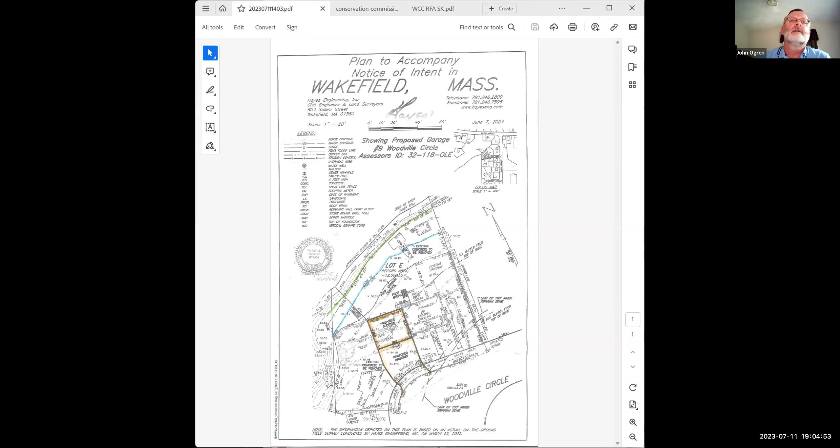This property actually backs up to the Mill River. In terms of what's existing on the lot, there's an existing driveway to the right of the house, there's an existing house, and pretty much the remainder of the lot is lawn area. This is the driveway, existing dwelling. There's some concrete pad areas, there's a shed out back. The Mill River is basically the center line and the property line for this property, and essentially the remainder of this property is basically lawn.

In terms of resources, there's what we've identified as a top of bank, which is the top of bank for the Mill River. We're using that essentially as the start of the riverfront area. If you go 100 feet from that top of bank, that's essentially this darker line here. As you can see, pretty much the entire lot is located within that first 100-foot riparian zone. As far as other resource areas, there is FEMA AE zone, 100-year flood, identified as elevation 56, and that's that blue line here.

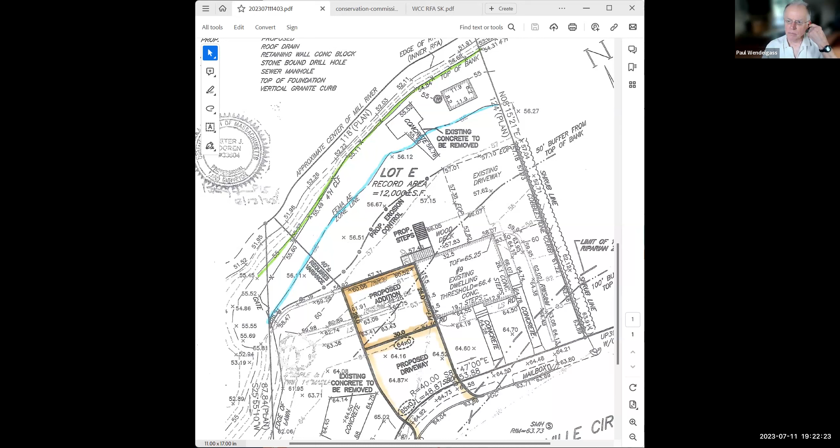Can you see it? I think John has to stop sharing. Stop, I'm sorry. Yep. I am stopping. Yeah, it's on page 4 of the narrative. Sorry about the scrolling.

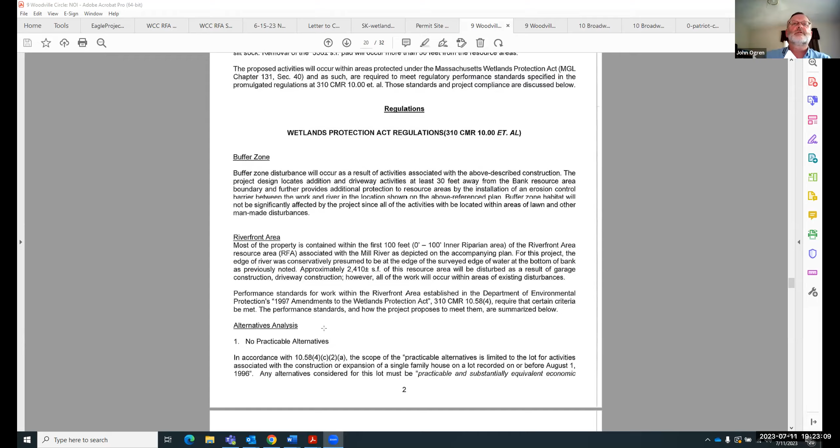Keep going a little further. So here's the alternatives analysis. Keep going, it's on page 4. It's the last one. This is the no significant adverse impact section.

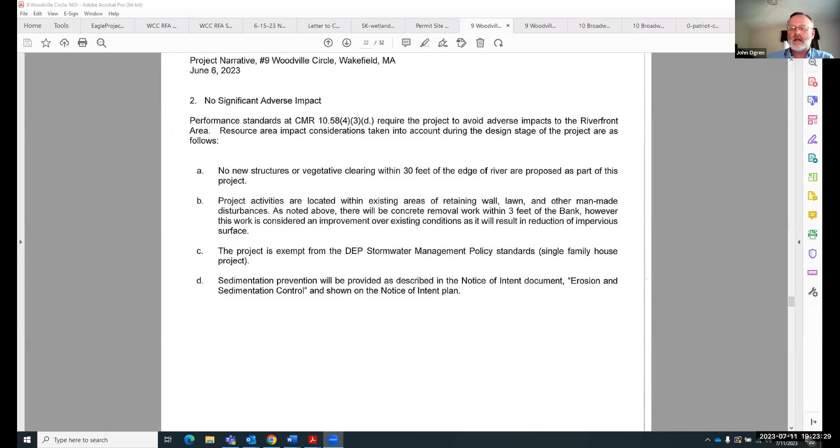As part of part A, it states that the requirement of A may be allowed only if the applicant demonstrates, by a preponderance of evidence from a competent source, that the area of undisturbed vegetation within the overall average width of 50 feet will provide equivalent protection of the riverfront area, but that the partial rebuttal of the presumption of significance is sufficient to justify the lesser area of undisturbed vegetation. But again, this is an area that's already been disturbed, and that's why this does apply, and this is the section it would be under, but it really doesn't address a situation like this.

John, is the grass right up to the edge of the river, or top of bank? It's right up to the bank, yes, right up to that fence, which is right at the top of bank.

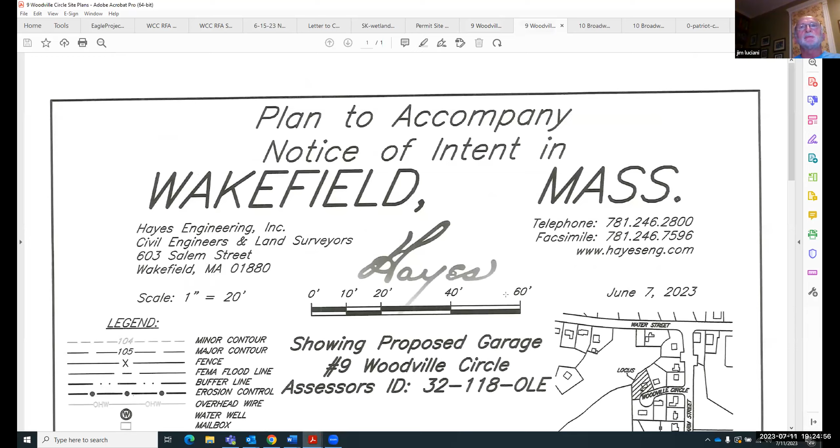So basically we're replacing a lawn with a building - with a garage or addition, correct, and a driveway, the proposed driveway, right? Yeah, we're gonna want to do a site walk, but I think you'd want to look at recharging, if you've got the proper depth of soil before groundwater.

Yeah, we can look to add some infiltration for the roof runoff.

Rebecca, do you have anything you'd like to add? Yeah, I have actually a bunch of questions.

One of them was, John, you were talking about that fence along the top of bank. I think that was probably put up when, behind the house, there used to be a pool. My assumption is when they put in the pool, they put up the fence. I don't have any previous filings for this lot, so they didn't - when they put in the pool, and then I think they subsequently filled in the pool, and I didn't have any information on it. No one ever filed anything. So I'm wondering, that fence that's there, it wouldn't have met the requirements of a minor project because it's not 50 feet away. And it most likely - did you say it was chain link to the ground?

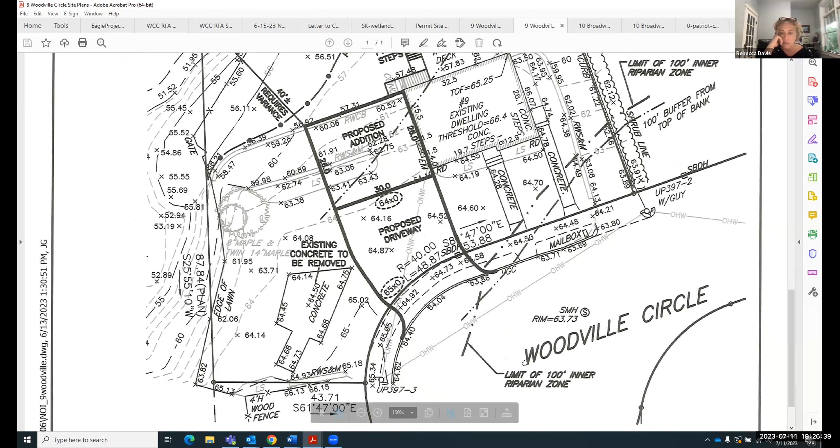Yes. Okay, so it would have probably prevented wildlife passage. I'm wondering, is the homeowner still interested in keeping that fence there if there's no longer a pool? I'm indifferent towards it, it can go, it can stay.

Okay, that was one question. I had a couple. And then there's a shed back there with a well - is that a well? If you could scroll up a little bit. And if it is a well, there is, is that just for irrigation or what's that for? Yes ma'am, irrigation. Okay, I don't have any information on the shed or the well either.

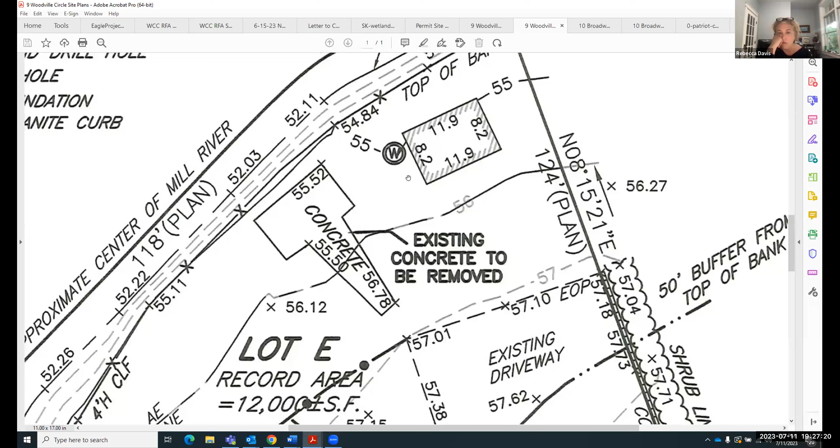I don't know when that shed was put up there, I'm guessing between like 95 and 2000, I think. So I just wasn't sure about what was going on over there with that well and the shed.

And then I had another question. All right, that would have been for Libby a little bit more, but yeah, thank you.

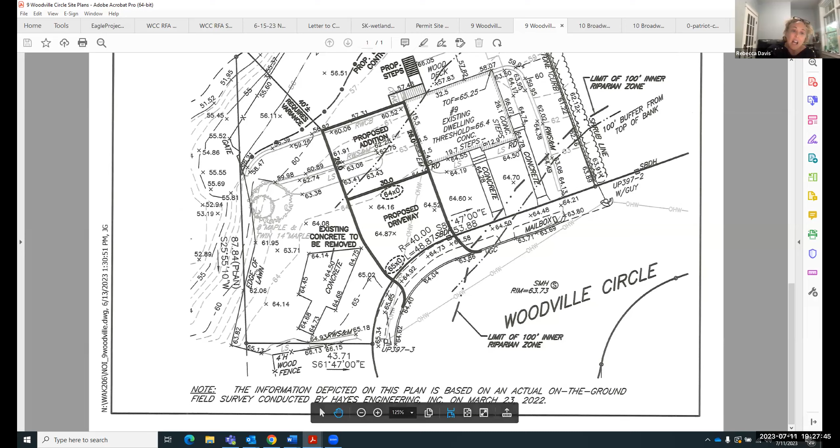Zooming out - can you see, go to the lot line that's mostly to the west, down by the road, go down a little bit. All right, so to the left where it says edge of lawn, and then on the next lot over it slopes downward. Do you know, Libby, I know that's not the property there, but do you know if she looked to see if there was wetland over there? Because on one of the aerials I have, it looks like it wraps around, and I'm just wondering if she noted how close it would have been to something there.

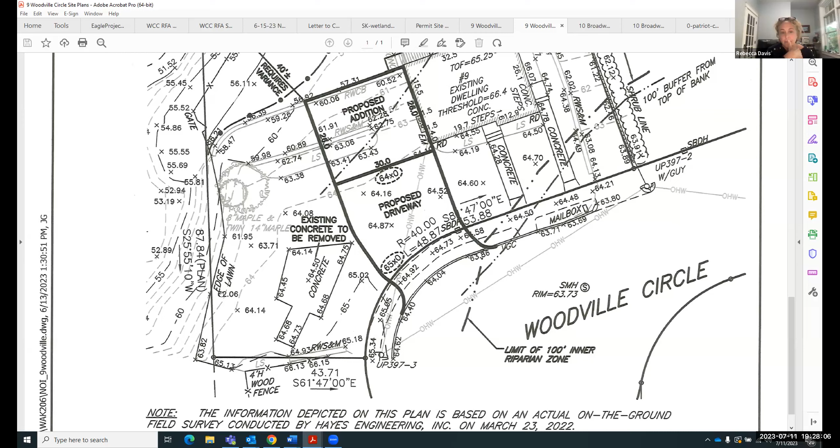Not expecting her to go on anyone else's property, just wondering if she noticed it when she was over there. Yeah, I don't believe Libby went over there and looked in terms of the wetlands, no. Yeah, that's the spot. All right, well, we can take a peek at that on a site visit anyway.

I was just curious. And then I was going to offer Teresa to go through the riverfront with you - if you want, I can try to pick out the topics, 1, 2, 3, 4, and we can go through some of it pretty quick. That'd be great, Rebecca. I think that would be helpful. That would be extremely helpful. I feel like we're starting for chapter 3 of a story - I'm sorry, I want to go back to chapter 1 and say, what are the regulations pertinent to building in a riverfront? Thank you.

What John was saying was that when you have a project within the riverfront that's not degraded with impervious surfaces, even though it's developed, it still falls under that initial category, similar to a new development. So they have you go through all the requirements. Starting with number 1, it just says the protection of other resources. Well, they don't seem to be doing any work in any other resources, so I think you've already satisfied number 1.

Number 2 is regulation? Yeah, sorry, finally. I'll tell you where it is. Do you have your regs in front of you? Yeah, it's 10.5834. Okay, thank you.

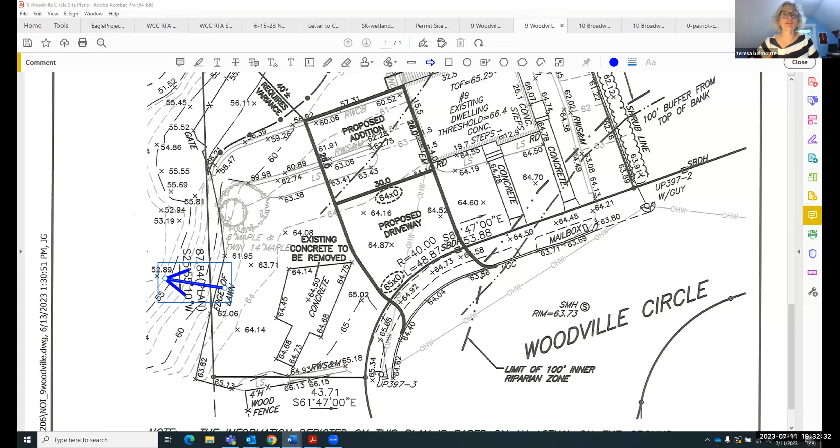Rebecca, this has to do with whether or not alternatives are practicable. Alternatives to what? The alternative is not to build something. Yes, because wherever you build it's within 100 feet. It's not an issue of, gee, can we build a house anywhere else, there is a house. And the issue is whether or not you should be able to build an addition and a new driveway in an area that's riverfront that the regulations govern. I don't know how you could ever have a practical alternative when you're doing it within the 100 feet.

For that matter, that's kind of what I'm getting at, is it's sort of, if you start with the assumption that nothing is allowed, versus if you start with the assumption that the addition is allowed, then there's a question of what is the most practicable way of making the addition, that begs the question completely. All I want to do is understand this. I just want to go through the language, because I'm missing something here. Something doesn't seem right to me, and I feel it's my fault for not understanding this better.

Rebecca, what would you say, how could there be a practical alternative, because again, there's no alternative, because no matter what you do, it's going to be within 100 feet. So, no alternative.

I know what you're saying. I don't disagree. I think when you run through these things, it's...

If this lot were a wooded lot, and I think this is what John was alluding to, you could require them to maintain that 100-foot zone, or set it back as far as possible. But setting it further back, you're still within the 100-foot, so there's no difference, right? What John was saying is if there were natural vegetation there, you would maintain it. But there isn't, so that's the thing.

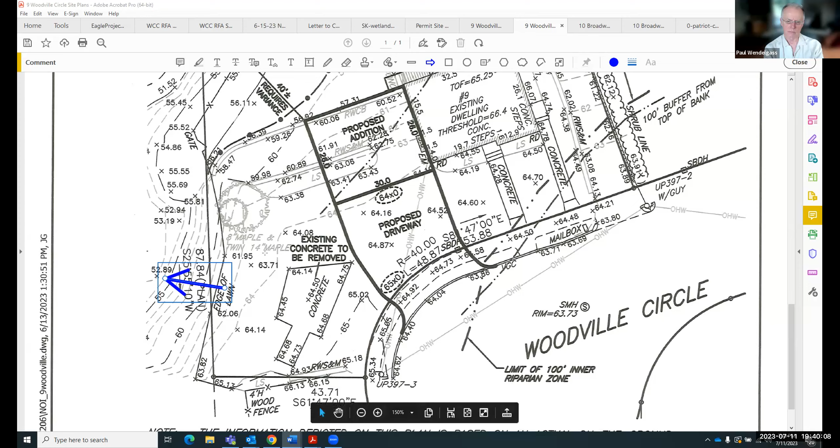How much of the lot is what, Rebecca? Developed. Because it is all on the riverfront, not developed - vegetated. Yeah, you could say that, that's a better way of saying it.

Can you guys see this, I just shared my screen. I don't know if you can see that. No, we're still seeing the drawing. John, wanna stop yours? Okay, here we go. Go ahead, I stopped it. Yep, I see it.

If you look at this, Paul, thank you, it's page 233 for anyone looking at the 246 pages of regulations. If you do it on the internet you get page numbers, it's a godsend. It says this D is the work, including proposed mitigation measures, must have no significant adverse impact.

Then it says within the 200-foot riverfront areas, which we are in, we may allow alteration of up to 5,000 square feet provided that at a minimum a 100-foot wide area of undisturbed vegetation is provided. Well, that ain't happening here, so it doesn't meet that.

At a minimum, if there's not 100 feet of undisturbed vegetation within the riverfront area, existing vegetative cover shall be preserved or extended to the maximum extent feasible to approximate a 100-foot wide corridor. Replication and compensatory storage required to meet the resource area performance standards are allowed within this area.

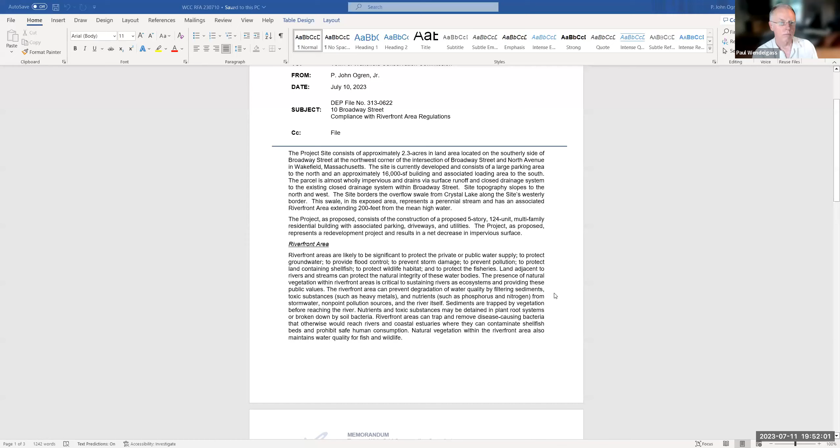All right, so there's a lot more background information, but to get back to the performance standards for riverfront area, there are sections A through G, and I can go through each one individually, and if the commission has any questions, we can certainly answer them.

A: at a minimum, the proposed work shall result in an improvement over existing conditions of the capacity of the riverfront area to protect the interests identified in Mass General Law 131 Section 40. When a lot is previously developed but no portion of the riverfront area is degraded, the requirements of 310 CMR 10.58-4 shall be met. I think there's no question that on this site, any of the areas in the riverfront area were degraded. In the existing condition, it's either crushed stone, pavement, or building.

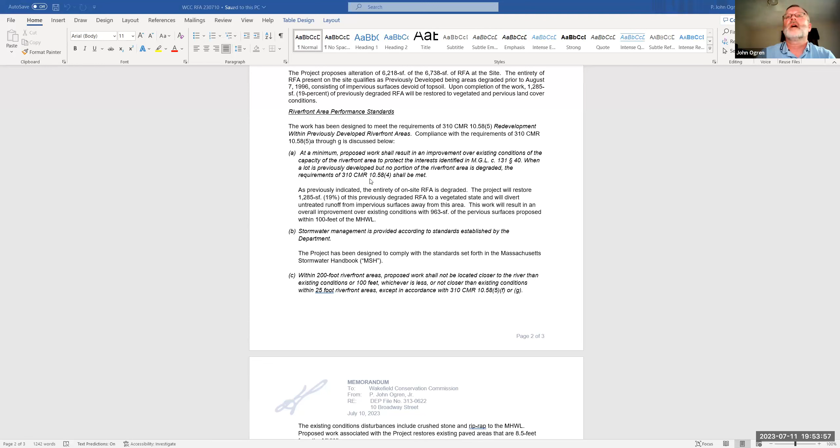So the entirety of the on-site riverfront area is degraded. The project will restore about 1,285 square feet, about 19% of the riverfront area of this previously degraded riverfront area to a vegetated state. This will also divert untreated runoff from impervious areas away from the riverfront area. This work will result in an overall improvement over existing conditions, with 963 square feet of pervious area proposed within the 100-foot riverfront riparian zone.

Stormwater management is provided according to standards established by the department. This project has been designed to comply with the standards set forth in the Massachusetts stormwater handbook.

On that note, this project has gone through some evolution in terms of number of units, the building, and parking. We're working on detail and the final design in terms of layout of the parking and building, which has been presented to the commission. We're working on detailed engineering plans and responses to comments received from the engineering department. Those will all be included along with an updated stormwater management report and the response to engineering, which should be forthcoming in the next week, so the commission will have that to review.

Within the 200-foot riverfront area, the proposed work shall not be closer to the river than the existing condition, or 100 feet, whichever is less, or not closer than existing conditions within the 25-foot riverfront area, except in accordance with F and G.

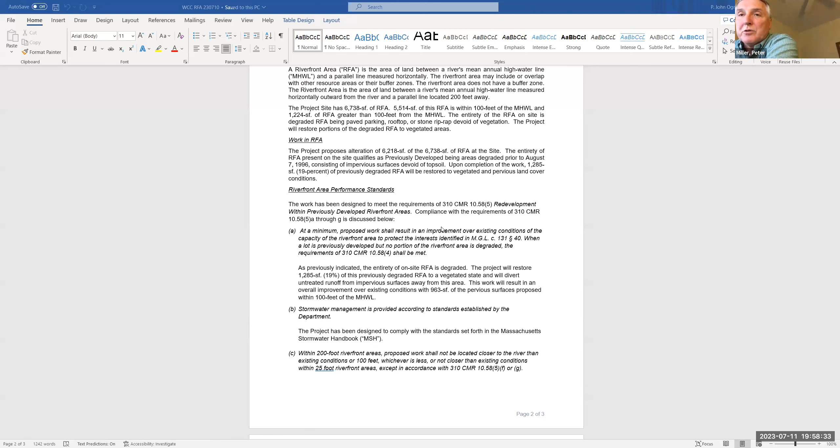Anybody have any questions or comments regarding that? John, could you put up that first picture you showed of the latest? Just want to see it.

So essentially what we're saying is, within this riverfront area, there are areas that we pulled back — the pavement is essentially right up to this crushed stone right here. We're pulling that pavement back in that area and vegetating it. We have a landscaping plan, and I'll also be submitting an updated version of it, adding bushes and trees in this area. Essentially we're converting this area from degraded to vegetated, and then beyond the 100-foot riverfront area, this area here as well.

John, where do you stand with the ZBA, or did you not get there yet? That's a good question. I believe we're at a point where — and that's why I finally decided to go forward with the more detailed engineering — we've pretty much locked in the footprint of the building and the parking layout. They're now talking more about the architectural features or the design of the look of the building itself.

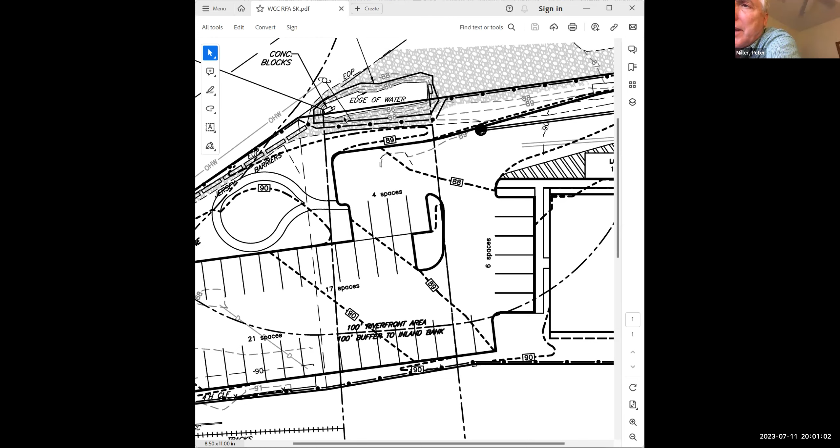Okay, got it. Where's the other property? There was another property owner that had property between the parking lot and another parcel. There's a fairly wide crushed stone area in between the two properties, and then there's parking over here on this adjacent lot. Looking out towards the lake, there was a building right along the property line, and trucks or machines were parked along this area.

This seems like a very unusual, isolated piece of water, and it's a river. From a river and wildlife habitat and corridor standpoint, it seems pretty limited, but there's no criteria as far as value, and under the definition with the updated USGS, this would qualify as a river.

Okay, any other questions? I have a thought, John. I assume that when you go before the ZBA, they're going to want to approve the landscaping plan, right? We've been requiring applicants with files with us to plant native species within the 100-foot buffer zone, so I don't know specifically, but I know you have the landscaping plan. I do have a copy of it. I don't know if you're going to be updating it.

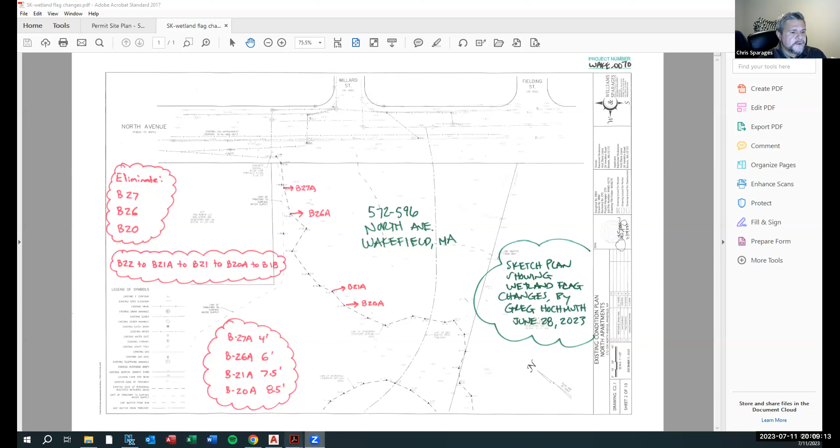And then what we did was we updated the site plan. Sometimes I don't know if it switches over to the other plan. Do you see a blank screen now? Okay, thank you. Let me just zoom in.

I'll start up here near North Ave, and you can see the old flags versus the new flags. So B26 was back here, and we moved it up slope a little bit. Coming down here, B21 was back here, we added a new flag, B21A, a little bit further up the slope. And you can see here this was the move between where B20 was and B20A, the new flag. I think that was the last one.

So if we were to show you the revised topographic plan, we do have a couple of changes to the wetland line and the distance between the wetland line and our proposed limit of work on this plan, B20A, 21A, and up here, B27 and B26.

In addition to the wetland line review, just to close the loop on the landscaping plan - when we presented it at the last meeting on the 20th, that plan didn't have a stamp and signature. It was sort of a formality, but I followed up with our landscape architect, Elliot Brundage, and got him to stamp and sign his plan. We submitted a stamped and signed version showing that the plantings within the buffer zone were to be changed to make sure they were all native species. That was also submitted for the record.

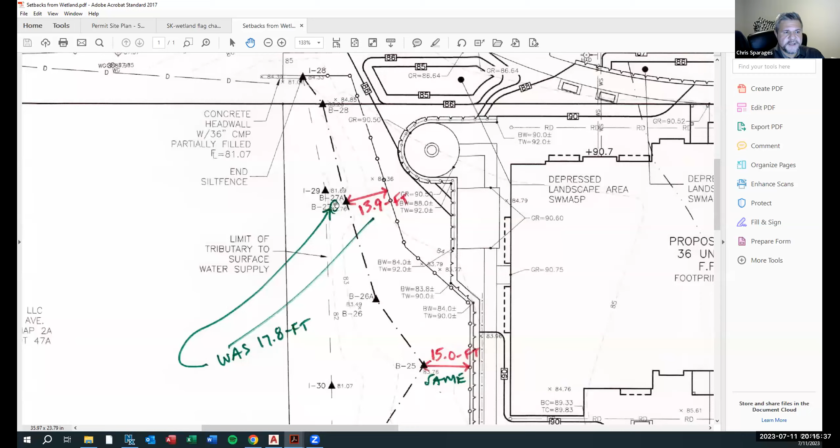This was our one previous pinch point that stayed the same, and here are the ones that got a little bit closer. When this flag was added, it caused a little bit of a weird shape here, and if you measure the closest distance from our erosion control line to the wetland flag, it's 7.7 feet now, where it was 15.1 feet. And similarly, where B20 was moved, it was 21.1 feet and now it's 12.7.

Chris, that's a wall in that corner, right? That's 7'7" and 12'7". That's right.

Because of the lay of the land, and that we have to maintain a certain distance from the estimated seasonal high groundwater table to support our stormwater management area and our parking lot - this is all a modular block wall with the larger blocks that are roughly 2 by 4 feet, and they encompass almost the whole downhill part of the site. So there's no access available for people or vehicles or anything towards the wetland.

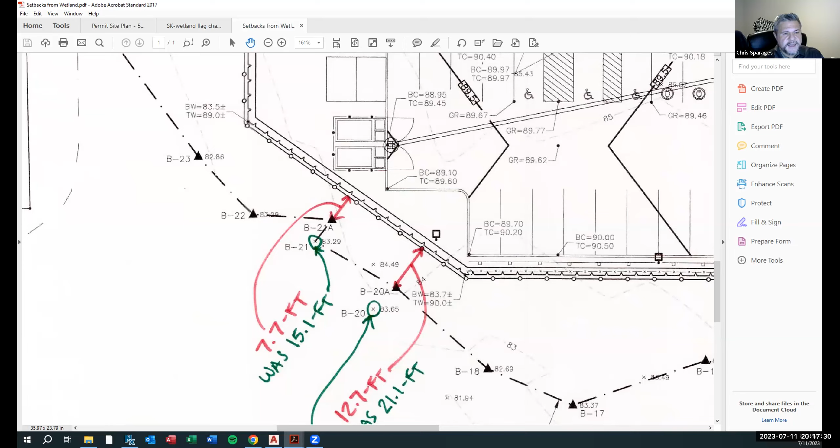So you'll be working - how high is it? Sorry, go ahead, Paul. No, how high is that? Sure, so it varies, but let's say over here, for example, we have a couple of elevation identifiers where we use the letters BW and TW, so bottom of wall and top of wall. So you can see here the wall is about 6 feet high here. Yep, and then here it's again about 5.5 feet or so. Okay.

So you'll be doing all the work on the street side of the wall - you won't need any additional room because that erosion control is pretty tight to the wall. Right, the nice thing about the modular block walls is that these are gravity blocks, so you don't need to dig a footing for it, unlike a poured in place wall. You just prepare the surface within 6 inches of the ground, and then you can start laying your blocks. So it's fairly simple in this case to work close to the erosion control line with this type of wall system.

Okay, now the other thing I wanted to add - I heard Rebecca say something earlier that reminded me about the knotweed out here, and this came up at our site walk with the commission members.

Greg Hochmuth also talked about it with Elaine and Rebecca. I think we've committed to a program of eradicating the knotweed between the wetland line and the limit of work out here, and to maintain no knotweed going forward on a regular basis, if it's okay with the commission, since we'd like to plant those trees we talked about and give them a chance to grow. We'd like to try to keep on top of the knotweed.

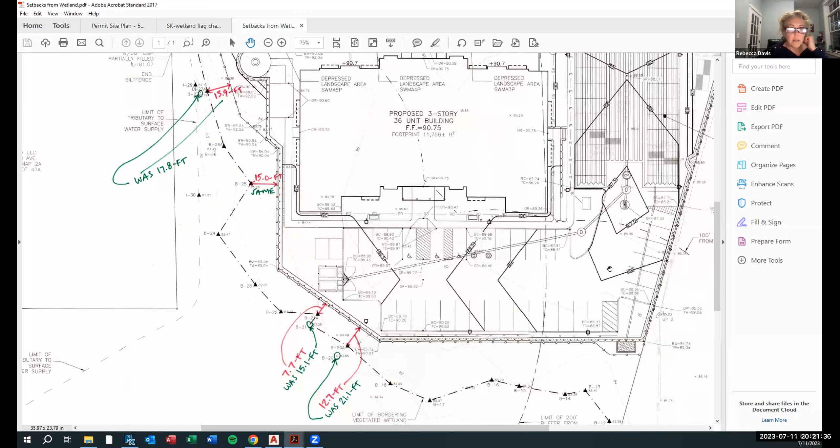I know Elaine was concerned about those. I think they're over by... I thought you said the last time they were gonna be preserved. Yeah, that one near the stream, near the street, would be preserved. I drove by yesterday and I saw at least a couple branches cut down.

I don't think it's realistic to think those are gonna stay. I think people are gonna be very nervous with those, it's a big old tree. One of them is really in tough shape. I can tell you which number it is, just give me one second.

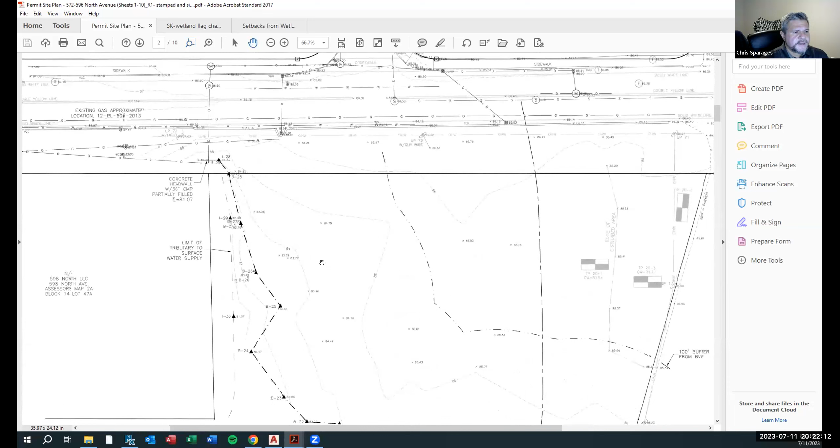I think it's over in this vicinity here. Let me go back to our plan... yeah, 29 and 26. Between 26... I'm not gonna say 29, so this is a 26. I know it's over here somewhere. Oh, it was a 26 rather, and a large 27. Yeah, it was a rather large willow tree, and we confirmed it's on the downhill side, the tree save side, where we're not proposing any activity.

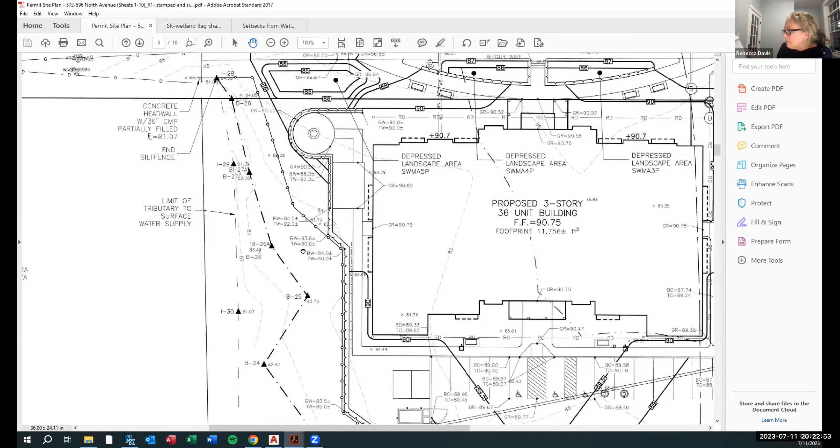We confirmed that. There's another one, there are two. Can you look at trying to trim it out and see if you can save it? They're not proposing to remove it. No, I know, but like Rebecca's saying, I agree it's probably gonna end up coming out, but one big half of the thing is kind of laying on the ground, so if you cleaned it up a little bit, it might rejuvenate it.

It doesn't look like... yeah, we'd be happy to limb that existing one we're talking about right now. That's not a problem.

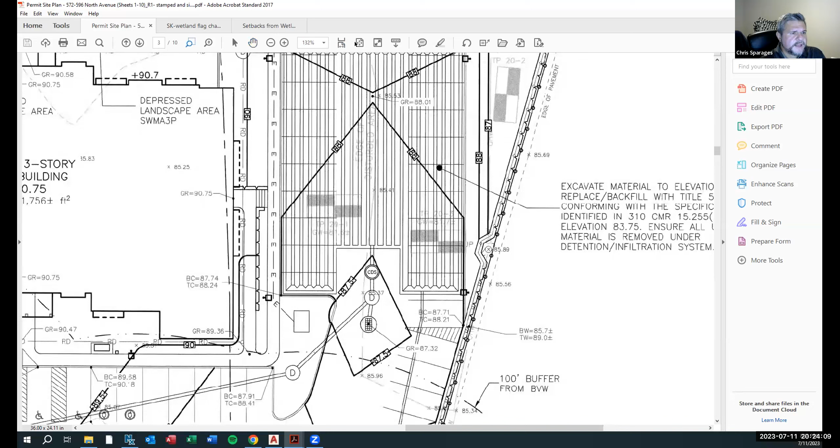And you mentioned the wall is to fill so you can get above the groundwater. What's the elevation of the seasonal high groundwater? Let me find that information. Our test holes were done in the vicinity of our stormwater management area, and we have estimated seasonal high groundwater table up in this area, roughly elevation 81.5.

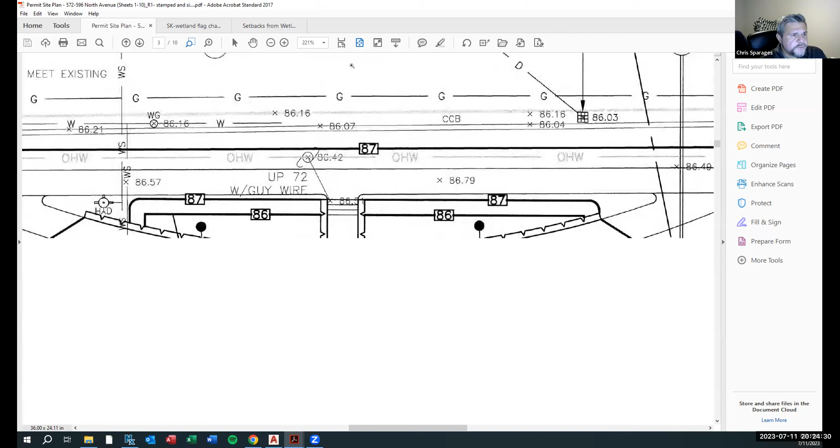To put it into perspective, the wetland line is down here, roughly elevation 82 to 83 near the wetland line. Where the test holes are, the existing ground is roughly elevation 85 to 86, and it's relatively flat all through here. Both test holes had estimated seasonal high groundwater at 81.5 and 81.6. Finished grade of the parking lot is about 6 feet above that.

So what's the detail look like at the top of this wall? Is it a modular wall of some sort? It is a modular block wall. They're very large blocks, at 24 inches. I'll show you the detail for it, including the fence on top.

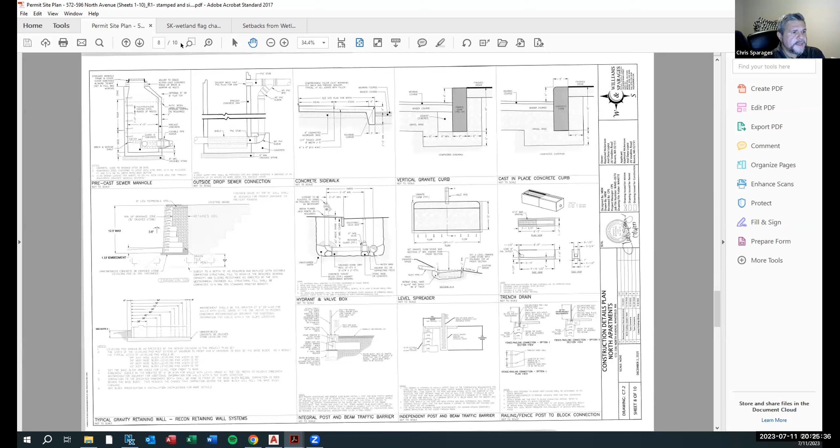If I come down to the detail sheet for the wall, you can see that depending on where it is, the blocks closer to the bottom, depending on how tall the wall is, are larger than the ones closer to the top. The shape of the concrete block is scooped out a little bit, which allows you to use some stone or loam and seed pretty much very close to the face of it.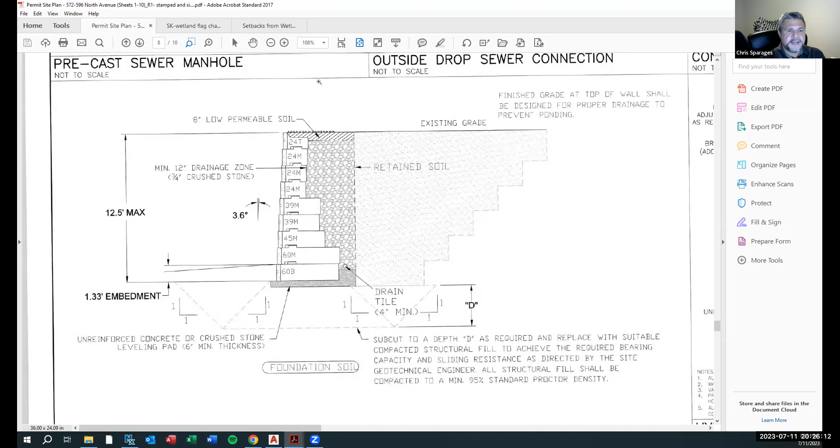And then you're going to put a fence on top of that? That's right. We have a detail that provides for 3 different fence and guardrail combinations, depending on where you are on the site. If you go to our layout plan and follow the wall around, it's more of a decorative metal fence around the front area, where there are some common areas and gathering spots. Then as you head towards the back, it's a 4-foot tall black chain link fence with a guardrail across this section of the parking lot.

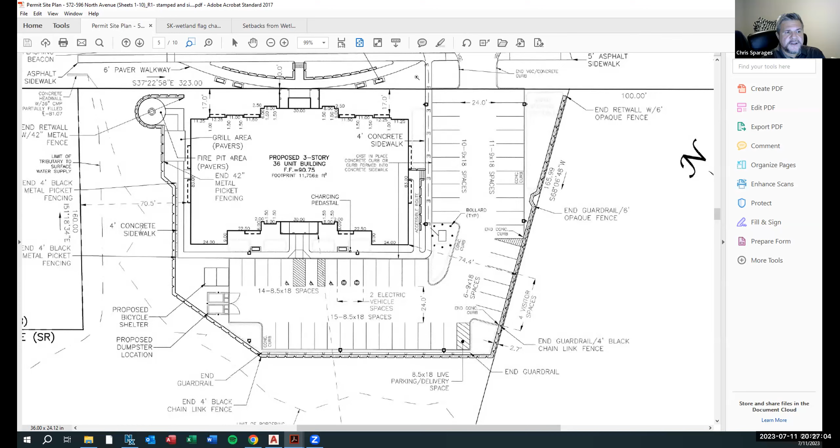Along the side we share with the Knights of Columbus, we're installing a taller fence at 6 feet high and opaque, because neighbors down the street, I believe on Willow or Walcott, on the other side of the Knights of Columbus, there are some single family homes, and there was a concern about what that view looked like. So we have a 6-foot high fence along this property line.

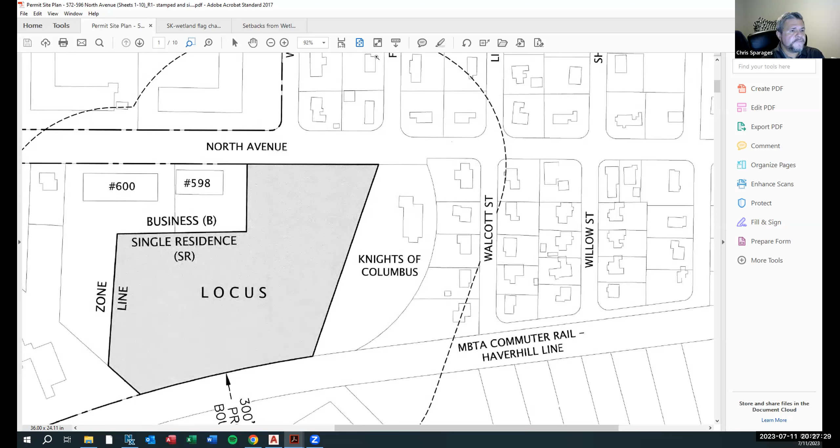The zoning board of appeals was very particular about making sure that our plan matched the landscaping plan on all of these details. They're very detail oriented.

Any other questions from the commission? So I have one now. What do you think our rationale can be for allowing something to be built within 25 feet? I said, we have a policy of not building anything within the first 25 feet of the buffer zone, right? Right, this is a... 40B, right? Yeah, this is a comprehensive permit project.

That is correct. But you still have to get, you're not exempted from this act, I thought. Not from state regs. So I'm asking, you have to comply with the Massachusetts Wetlands Protection Act. That's correct. So our policy, again it's not a bylaw, but our policy is not to allow anything within 25 feet, and yet the wall is within, at the closest, 7 feet. Yeah, 7.7 feet at this pinch point here. So I'm asking you, what is the reason why we should allow this?

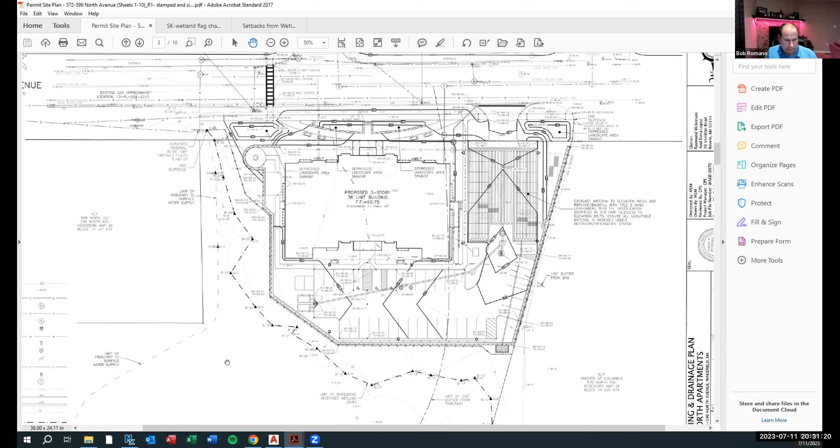Any other concerns or questions? How much of the... can you just go along with the pen to show where we're within, not within, where we are?

We don't have a 25-foot buffer zone. I just want to look at the significance of it.

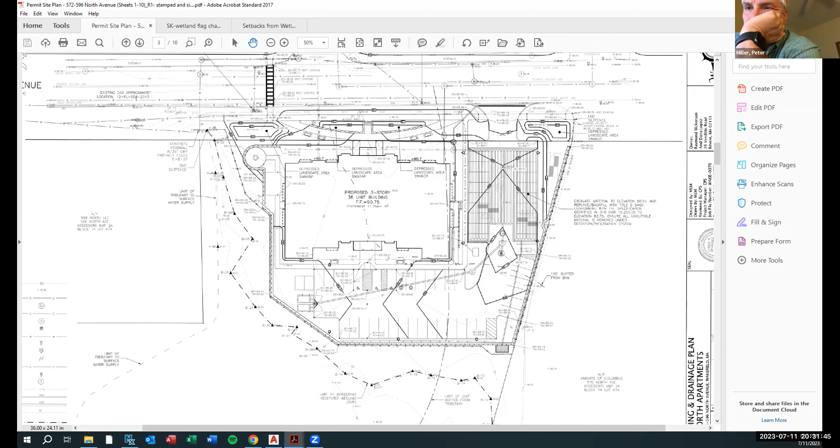Sure, I can do that if you don't mind me sharing my AutoCAD screen. That's going to be a little bit easier for me to show you. It's a little different screen to look at—it's black, so it's a reverse sort of image. But I can easily come down here.

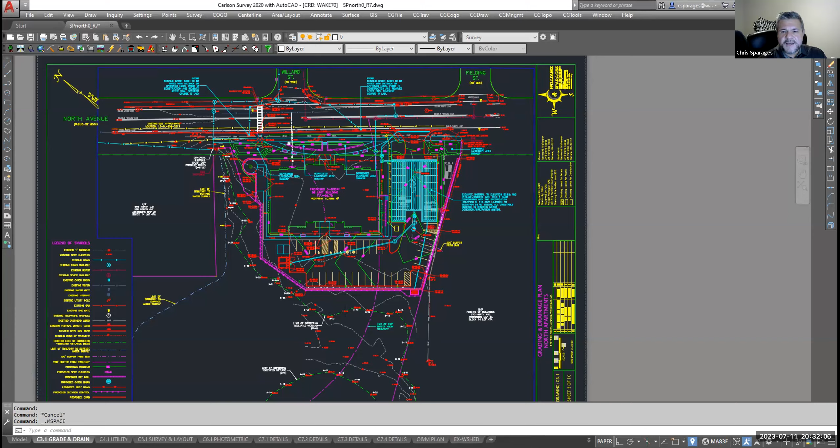So this line is the new wetland line. Let's see here. If I show you a 25-foot buffer—so that's what the 25-foot buffer looks like. You can see down towards this end of the site, we do a pretty good job of honoring it down in this section of the project.

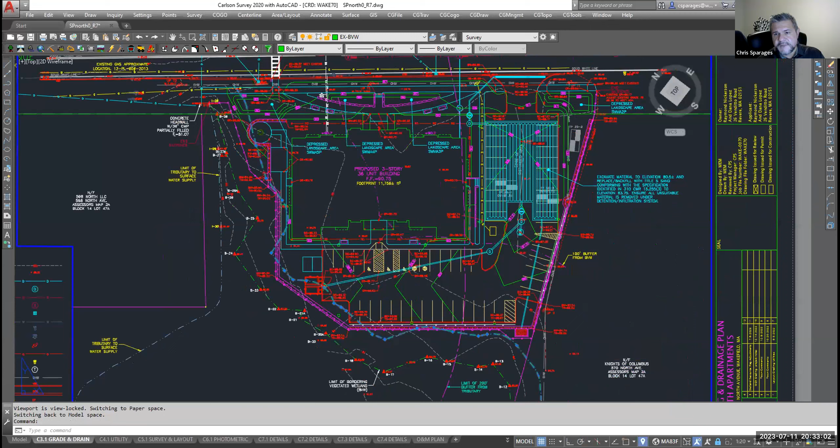And then as we come around to the pinch points here at the B21 flag, you can see how far the 25-foot comes in, and then we come around the bend and we're back to 25 here. But then we have this flag here that says it's a 15-foot setback. As we come around the bend, we do a better job of getting closer with the improvements to meeting the 25. So that's what that looks like.

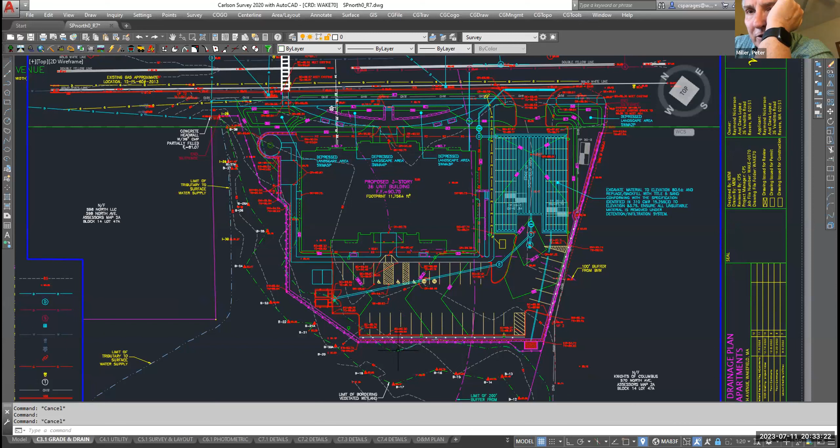What is the blue—the new wetland line or the old one? So this blue line here represents the one that's touching the wall. Maybe there's something that looks blue to you—the blue that he just took off, that was the 25-foot buffer line. Oh yeah, this one here. Yep, okay, so that's the 25 feet.

Got it, thank you. So a good portion of it is at that point or just around it, closer. I guess my question would be, is there any flexibility on that back area around the dumpsters and the parking to improve the buffering at all?

So in that area, you can see we do have a little bit of open area back here. This is the dumpster corral area for recycling and municipal solid waste, and this is a covered bike rack area. This area is all open—we were hoping to maintain some area for snow storage, which is the primary purpose of these open areas on the top part of the project.

But to answer your question—and I know this doesn't matter a whole lot—it's hard for us to follow nature with straight lines, but the walls are shown straight because it's more pleasing to the eye and easier to build. To answer your question, it's possible to go back and recreate the 15-foot setback by jogging these walls in a little bit, and maybe even moving the dumpster corral and bike rack over a little to get back to 15 in this area. That is possible.

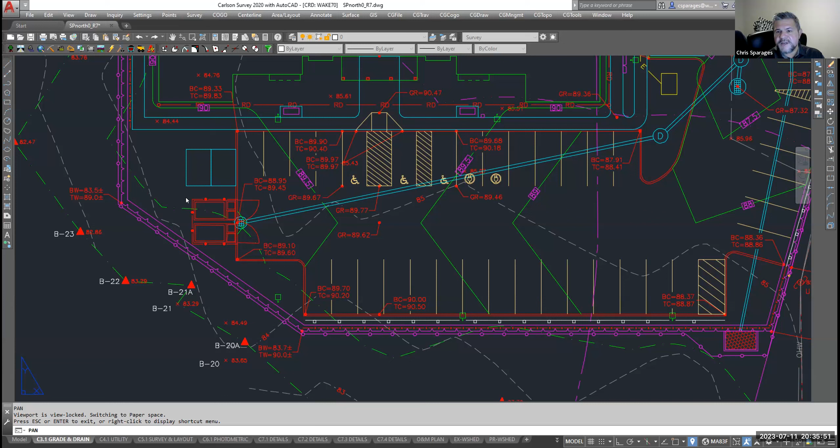Did you have any plantings going up in that area? Let's take a look real quick at the landscaping plan. We have two trees proposed in this area—one here, and another behind the bike rack area. But no, there was no ground cover proposed except for loam and seed over here, because this was going to be maintained as one of our snow storage areas.

Not very big, but that's probably really not practical. And I want to ask my colleagues, are we concerned about the snow storage area being used so close to the wetland?

Well, that's why I like the idea of having trees up there that he's talking about. No, I mean it just seems to me like we need to put the wall further, closer to the thing so we can put snow there. It seems like kind of a twofer here against us.

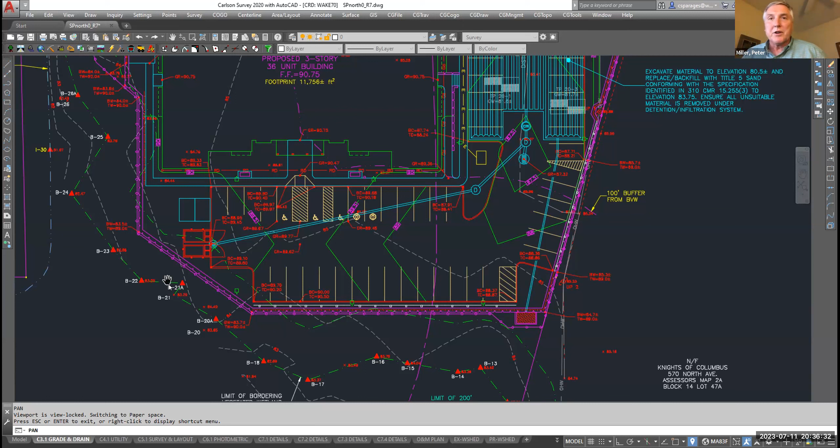Well, to Chris's comment, if you jog that wall and got rid of that snow storage, you'd be accomplishing two things. You would eliminate the snow storage and you'd also get back some of your buffer.

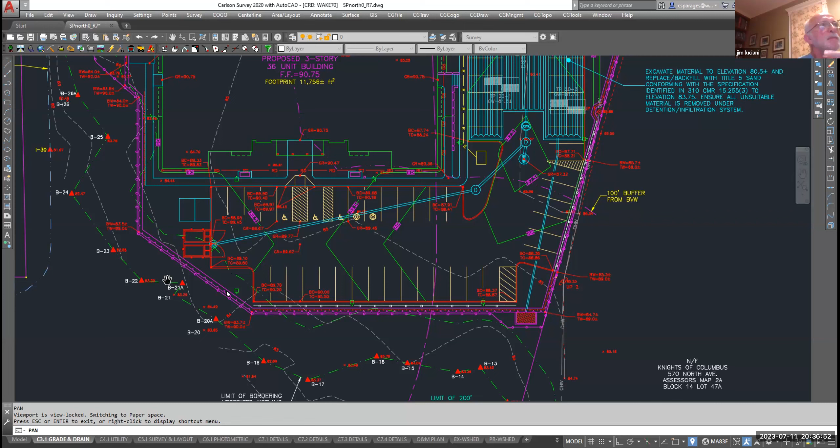Where are you talking, Bob? Right where the cursor is now. So let me show my hand here. So it's possible to take this - the purple line is the retaining wall - and instead of having these straight lines that create some open area up on top, we could jog the wall in and get closer to the curb here, and then jog it back in here. And then slide the dumpsters and the bike corral that way a little bit to improve the buffer, especially where we have this pinch point with the B21A flag.

But I almost think it'd be better to put the trees in there like you were talking, because it's gonna prohibit them from carrying the snow in their bucket and dropping it off the edge. It's gonna force you to probably hand shovel it in that area rather than use equipment.

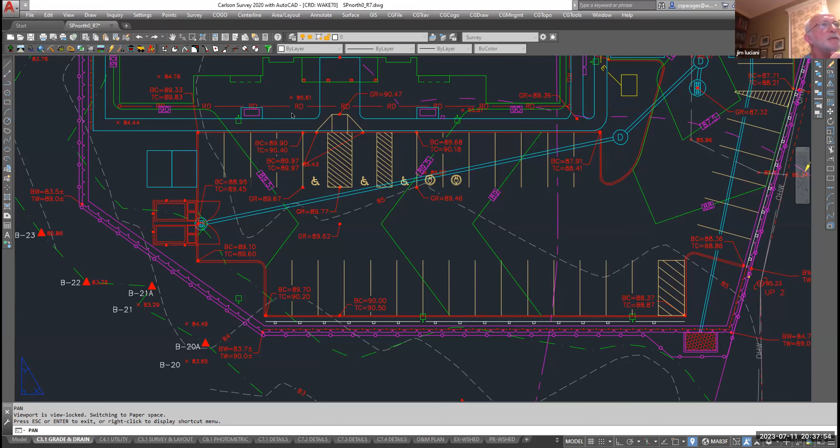Can you all see the landscaping plan? Is it still the CAD plan? Yes, it's still the CAD drawing. All right, sorry about that. Let me go back here again and just show you the landscaping plan. So this is the area where I was talking about the two additional trees.

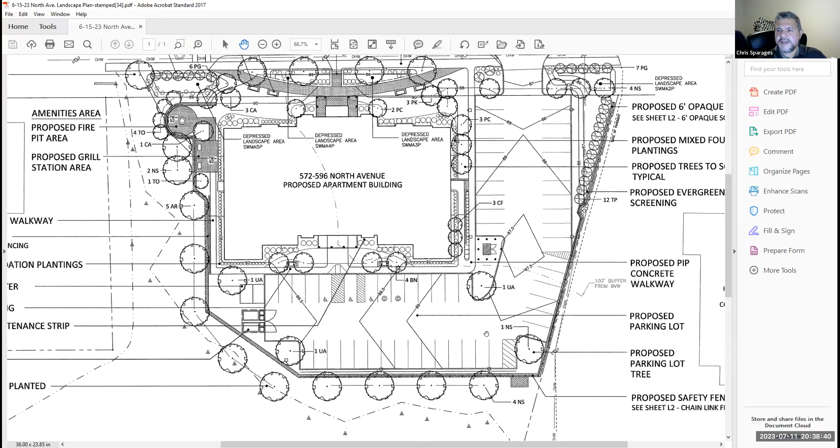And the dumpsters have to go there, huh? It's a logical spot, yeah. It's easy for a truck to get in there. Also, just to tell you, after we got out of traffic advisory and some comments we got back from the lieutenant and town engineer, we thought about putting the dumpsters down here too. But this was a logical spot for a delivery truck to come in, whether it's Amazon or UPS, somewhere where they can pull in. Yeah, that's easy for them to turn and go.

So I guess the question for the commission is, would you rather see those two trees not there, snow storage not there, and the walls jogged to get more of a buffer, or remain as is?

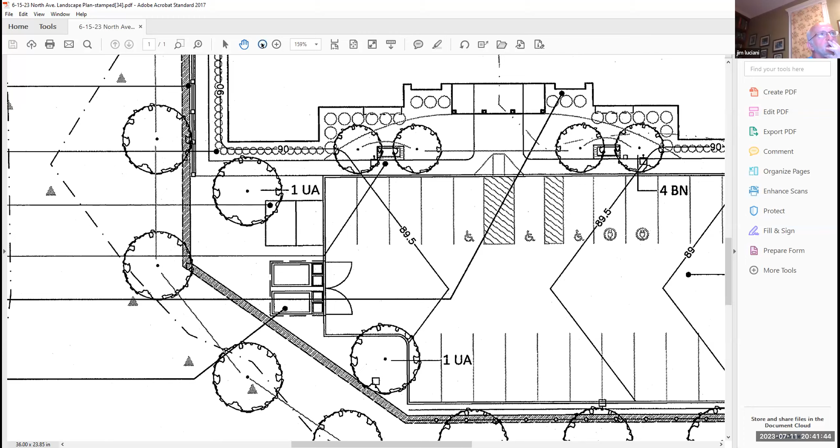I think the vegetation would be better. And the wall, the way it seems, where it's drawn now, it looks good to me.

I mean, logically, it's a better look having the wall straight like that. There would be benefits to your point, Jim, of having another tree. I think it'd be nice if vegetated in that area. But...

Whatever. Well, if you are concerned about some snow storage, we could even throw in a couple of woody shrubs. Chris, I'm gonna ask you something, Chris.

I mean, it's crazy anyways, but did you ever think of heating that to melt the snow instead of trying to carry it out or push it around? That's not... I'm not gonna laugh, I've heard of those machines that do that.

But I know Mr. Lopez operates another similar property not too far away. And I think the plan, we've talked about it in-house with our team, that he would truck it off-site to another location.

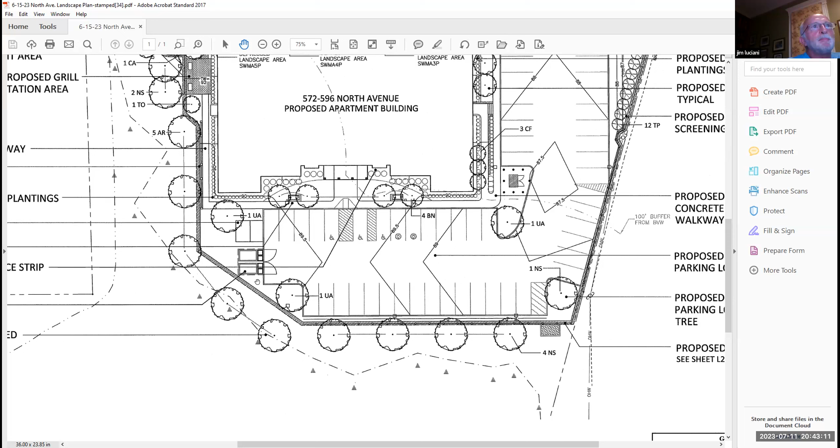We had one on Audubon Road that did put the heating system in their parking lot. It's basically the same type of stuff you have here. Jim, you're referring to a heated lot, not a snow melting machine? Yeah, it was a heated lot. Exactly. Oh, heated, okay, that's different. Right. And they said it works great. They've been there for like 5 or 7 years now, and the system works good.

I don't know, you maybe want to check and see if it makes sense money-wise. They said there was a return after 10 years or something like that, they would start to see a return on their money. I don't know the specifics about it, but it might be something worth checking out, because you've got all the vegetation, you've got the same problem everyone else has - no place to put the snow. You can't put it on the plants because you kill the plants, or you're gonna keep replacing the plants every year.

So I can promise you that we'll - Dan is on the call tonight too - I can promise you that we'll look into it, but I can't promise you that we'll commit to it. Yeah, no, I understand, I understand.

I checked it out with the people over there because we were looking at another project that we were trying to convince them it would be the way to go. And I mean, you can go and see them and talk to them about it if you want. What was the address, Jim? It's the big high rise, the big complex there on Audubon Road as you're going on the left-hand side. I don't know what the address is. Is it 1 Audubon Road, maybe? No. Okay, I think I know where you're talking about though.

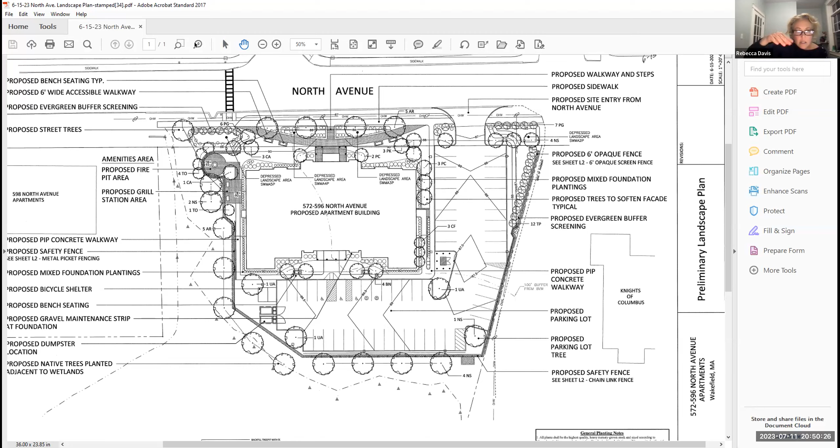I have a quick unrelated question. The depressed landscape area, is that part of the stormwater management for the site, in addition to what's going underneath the paved areas? I'm looking at there are 3 of them up towards the front, is it just like a little infiltration area? And what does it infiltrate?

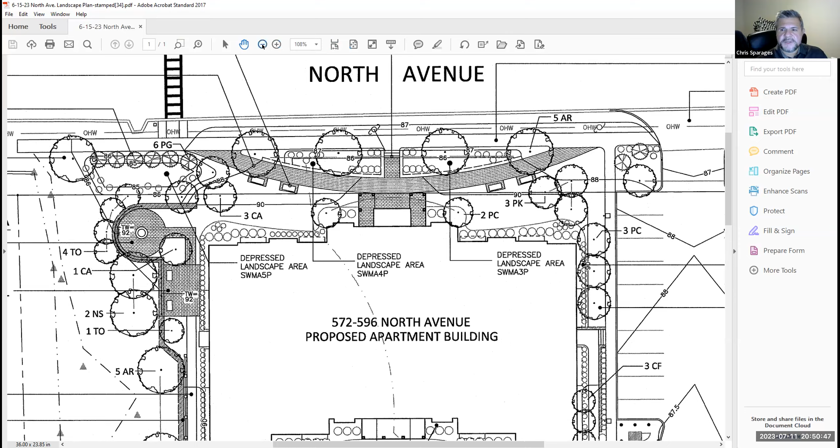So this was at the request of the town engineer, Bill Renault. We had some areas, this is an unusual site, let me zoom out a little more. There is a lot of land between the edge of the pavement of North Avenue and the property line. Our property line is way back here. There's quite a bit of land out here, it is unusual.

Sidewalks were really important to the zoning board of appeals, and having a separate walkway in front of the building was important to the architecture and look that the ZBA wanted for the project. To try to capture some of these landscape areas and not just let them run out to North Ave, Bill thought it might be a good idea to create a couple of small depressions to slow the water down, maybe get some infiltration. We didn't really run them through a model or anything like that.

We had an opportunity, and Bill said, would you be willing to create a couple of depressions? And we said sure. It allows him to get some credit toward the MS4 permit. He might get some phosphorus removal credit for them.

Is the bottom just grassed? And then I can see there's plantings around it, but yes, the bottom I believe is just grass. We went back and forth with the zoning board of appeals on what material was going to be used. It was mulch, then it was grass. I think we ended up at grass, if I remember right. So it's just capturing the little bit from the sidewalks or the walkway, the landscape areas. That's about it.

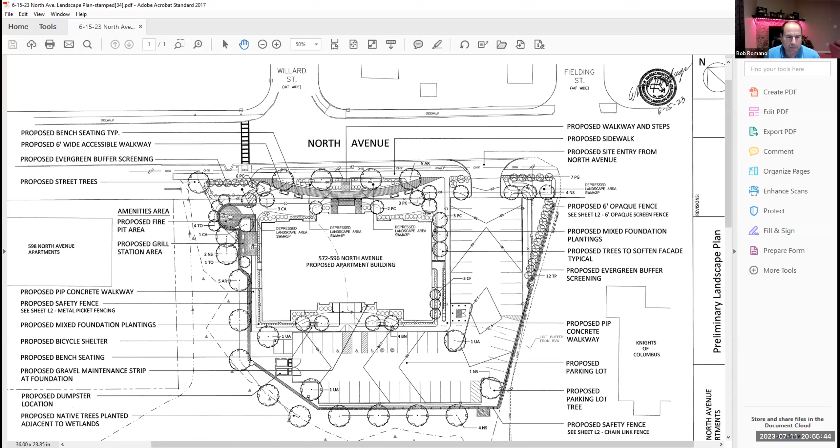So our next scheduled meeting is August 1st. Do you think you'd have that information available prior to August 1st? Absolutely, we've got an eradication plan we can use as a template from another project, and updating the landscaping plan and doing the tree count won't take very long. So you'd be okay with us continuing to August 1st? Yes. Okay, excellent. All right, well thank you, Chris, and we'll see you in a few weeks.

That'd be great. If I might be so bold as to ask the commission, do you think we might be close to closing the public hearing at the next meeting? Not to speculate, but we've only asked for a couple of minor things, so I would think we're very close. Anybody else have a comment? I agree. Yeah, I think we're very close. I agree. All right, we'll let you get back to it, but we'll see you soon. All right, thank you so much. Thank you.

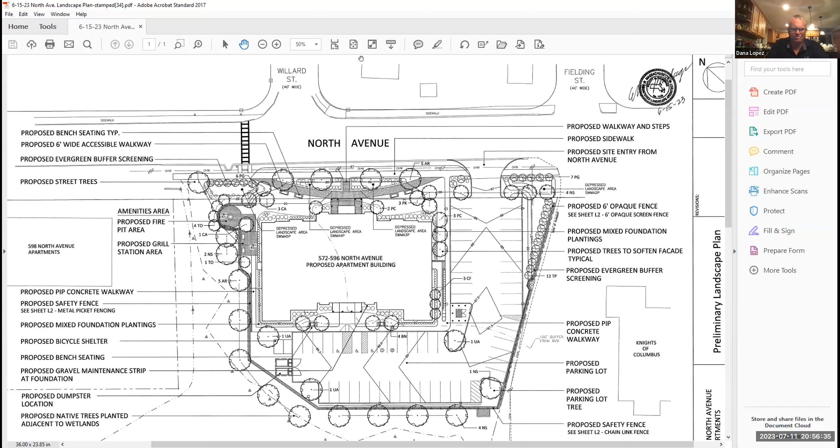It's 0 Patriot Circle. This is a continued public hearing. It is an abbreviated notice of resource area delineation to confirm approximately 306 linear feet of BVW. I know a number of commissioners did go out last week, and some of us have been out there previously. Is the applicant here? Yes, I am, Stephen Leppo. Hey Steve, how you doing, guys? Good. Rebecca, you and I saw Elaine has confirmed the line. Yep, she went out today and sent that email saying she confirmed the line. Yeah, I haven't been out there. But I think you guys have been out there. Yes. Okay, any questions from the commission? No. Any concerns? No, we've looked at this before.

All right, so would somebody like to make a motion to approve the resource area delineation? I'll make that motion. Is there a second? Second. Any discussion? Hearing none, all in favor? Haley?

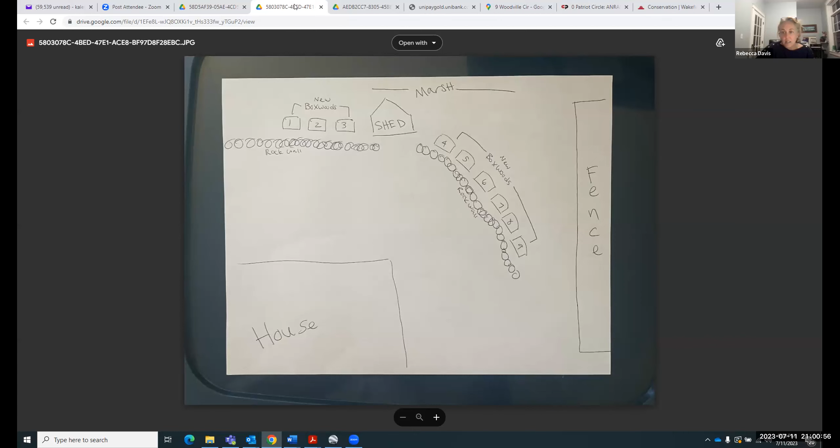So number 4 has proposed to do some plantings, and that might be on the next one, yeah. So, I suppose you guys can either-

Who saw the property? I'm sorry, Elaine went to see it. We struggled, we spent an inordinate amount of time last meeting because none of us had seen the property, and you can only discern so much from photographs. We just needed someone to go out there and actually see it. When Elaine went out there, she looked at the trees, because that's what was requested. There's a few things going on.

Can I just ask, why are we talking about this when the homeowner is not here? Well, we asked them to provide a planting plan, so it looks like they've done that. Right, but they chose all boxwoods, which are not native. I was going to ask that question- are they on the native plant list? And if they aren't, we should ask them not to put in- they're something European or Asian. Right, okay, all right.

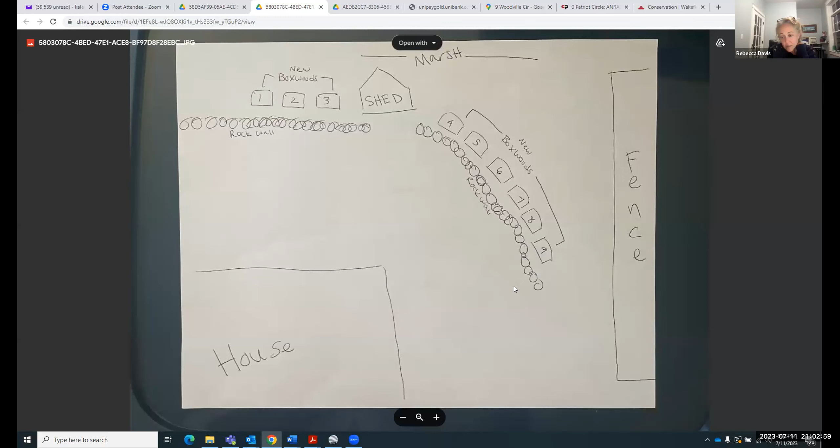Well, maybe- Rebecca, do you want to go ask the homeowner if you can take a peek, or are you guys not in? I know Elaine went out there, but what she looked at was the request for tree removal, so she looked at the state of the trees. If you zoom into that picture, zoom in-

I'm not entirely sure the location of that shed is not within wetland. The only point I make is that maybe there's a statement made that when it eventually gets replaced, it shouldn't be in the same spot.

It's not grandfathered in that spot, but that's something to take a look at. And then, of course, the non-native issue - I think the tree policy references native plantings, so we'll go back and request that it's native planting. That's fine, because we don't want to make a decision for the homeowner anyhow - he's going to come back anyway, so it'll work out where he can attend and provide something native that he's happy with.

Wasn't there an arborist letter about some of these trees? Root ball exposed, damage. So there wasn't - we got an arborist letter for number 6.

And if you look - can you zoom in a little bit on this picture, stay here to the right, zoom in. A little bit more if you can. I'm not sure, that's all I can go. I think that's it. Okay, so you can see - over, alright, well there you go.

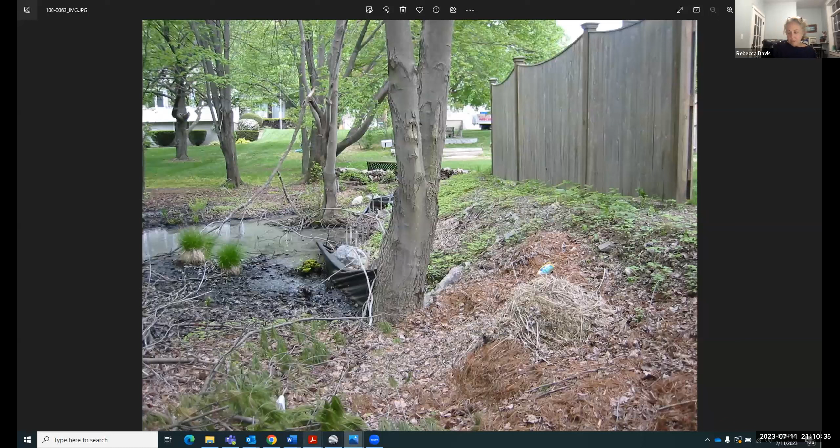Well, can you ask the owner of 6 to appear before us at the next meeting, next hearing? Yes, I can do that. Maybe they can put some ribbon on the trees that they want removed. Are we talking about number 6? With either one of them. Yeah, 6. I think before we do the tree removal at 6, we need to get their certificate of compliance so that their file is closed out.

We should probably have a site visit to review that, so that they can get their certificate of compliance. I don't know what the requirements were of the order. And then they do have, like I said, a request for determination for the pool. So I guess I would look at that plan to see what it looked like and then compare it to what it looks like now.

It's very confusing. Yeah, where's that pipe coming from that's discharging into the wetland? I know there's a drain easement. I don't know the origin of that pipe. I can try to look. Oh, hold on, let me look at something. Let me see if I can get you something else.

Is that street runoff? Like I said, I know there's a drain easement that goes along the side and along the back. I might have it, I don't know if electronically.

And I'm curious, that fill with that fence, so did you say that we have a filing for that work? Yeah, I'll send it to Ken. It's old and there's no certificate of compliance yet, so we need to close that out. Right, hold on, I'm not remembering this project. It's old, it's file number 289.

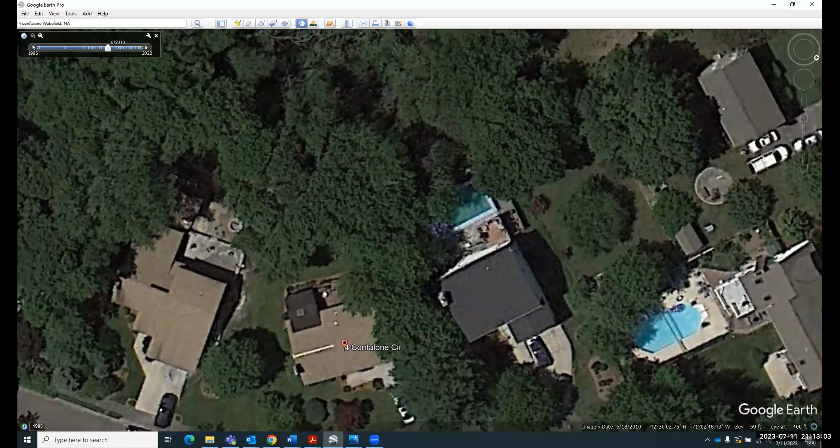2013. 2010, you talking about the pool? Yep. Oh, they filed, I can look that up. Because there was an RDA for that. Oh, I wonder if I have that plan. I don't know if I have that plan. Oh yeah, I have that too. So they got, that's their... 2007, right?

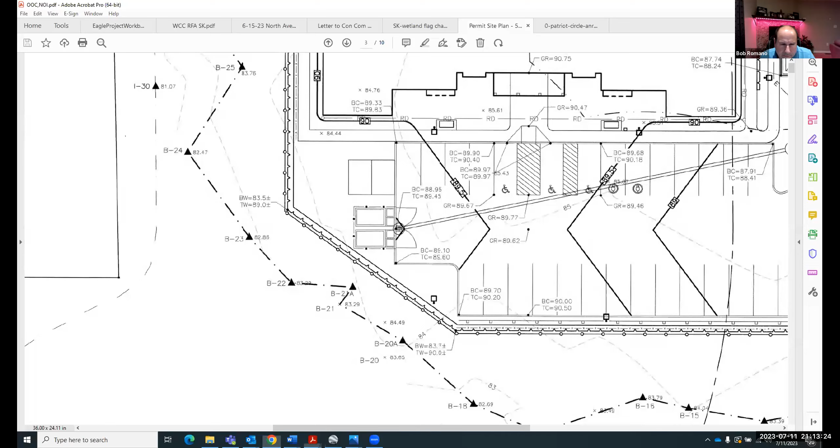All right, so that's the order to build, number 6.

And the pool was done in 03, around that's when the file was started. So the house, that's the order for the house? Yes, this is the order for the house. Okay, I'm hoping it includes some plan.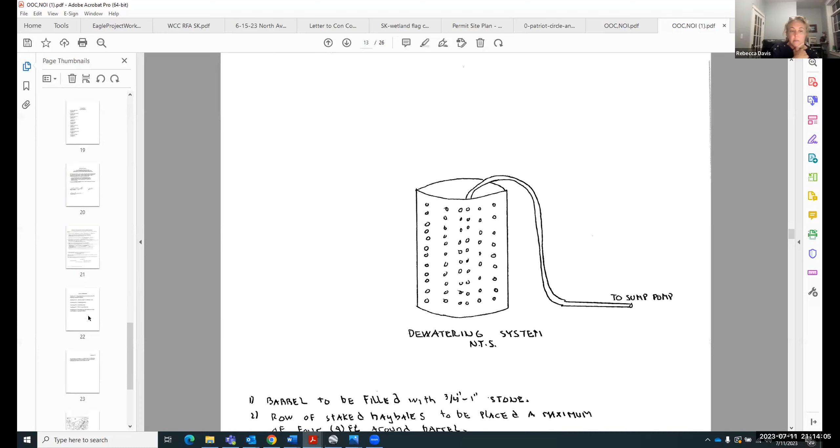So this would be the certificate of compliance. Do we ever get a certificate of compliance? No, I told the homeowner we need to clean this up. Did we ever get an as-built? Go down one more.

There you go. Rebecca, the order has expired. How do we issue a certificate of compliance with an expired order? We do that all the time. Yeah, it's on their deed, so we just look at the old order of conditions and ensure the requirements are met, then issue the certificate of compliance.

The thing is, if anything's different than the original order, we should have had a file for it. There's this chain of custody, everything should make sense one to the other. This order of conditions doesn't show a pool, however they did an RDA for the pool and have their approval for it. So although it's different now, that was appropriately approved through the process.

So you'd be looking at whether something was not approved, whether there's an addition to the deck, or whether there are any requirements. I don't know at the time this was approved, maybe there was a requirement you couldn't clear beyond the fence. Well, the fence wasn't there until the pool was there.

Is there an as-built anywhere in this file? No, I don't have an as-built. All right, so we don't even know if they complied with the original order.

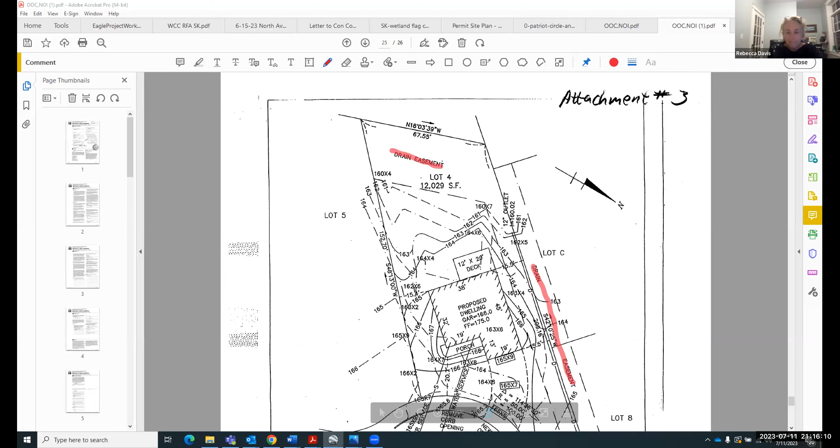So anyway, just so you know, now you guys are informed of what's going on at number 6, why they didn't come back for the tree approval. I told her to hold off until we get it all sorted out. So then I'll tell number 4 to just change the plantings to native, come back, and that should finish that out. Okay.

All right, what's next? Are you doing a site visit for that, the amended signature, or no? No. Not until we hear from the landowner.

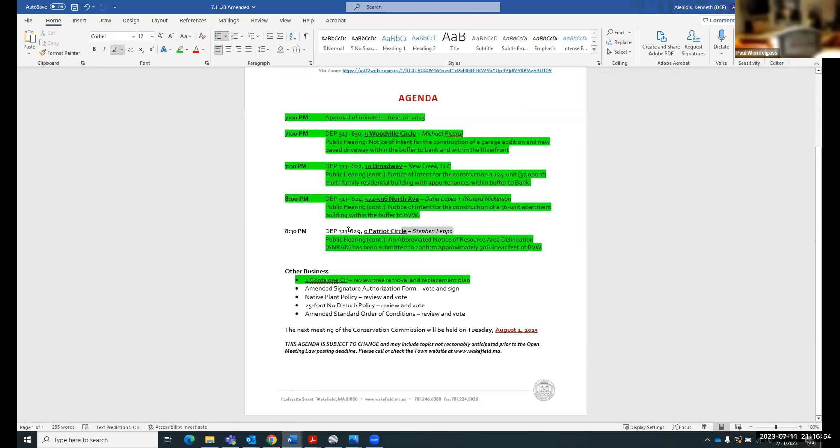All right, so next, on other business, you have the amended signature authorization form, which you've added Haley and Paul to, and Haley and Paul are okay being added. Yes.

Do you need to read the form or anything? I don't know, Teresa, do you think they have to read it? Yeah, we have to make the motion. Do you have to read the form aloud? Why don't we, can you pull up the form? I could pull up the form if you want.

So I guess I'm going to make the motion to authorize the conservation agent, Rebecca Davis, to physically sign Wakefield Conservation Commission documents in the name of the commission. And the term document shall mean any documents issued by the commission under the Wetlands Protection Act and any applicable law, including but not limited to orders of conditions, certificates of compliance and enforcement orders.

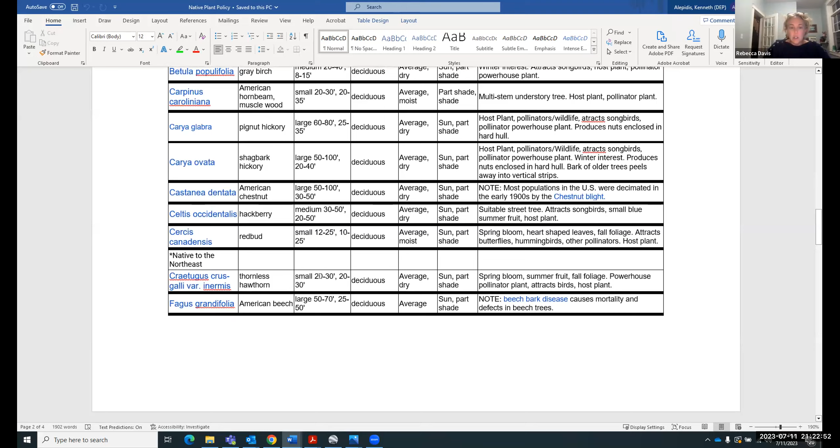Now, Haley, you pulled up some pretty snazzy information too. I didn't have a chance to incorporate that into here. I looked at the towns around us, but the two that I found most interesting, one of them was actually in, I think it was Connecticut, and I forget where the other one was, but it was a little further away.

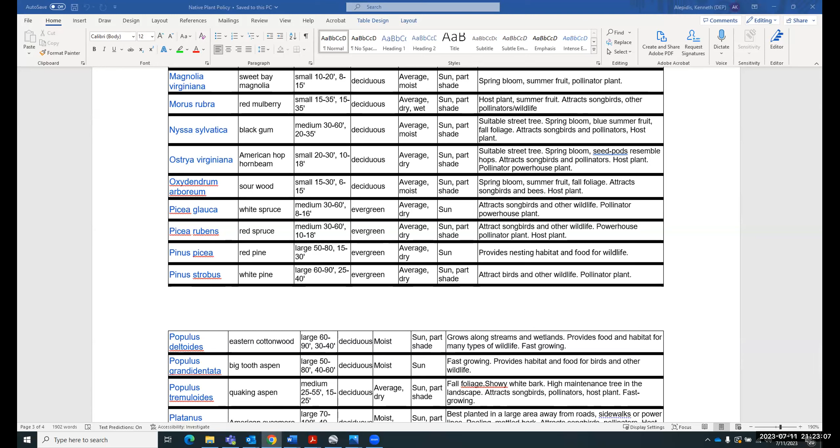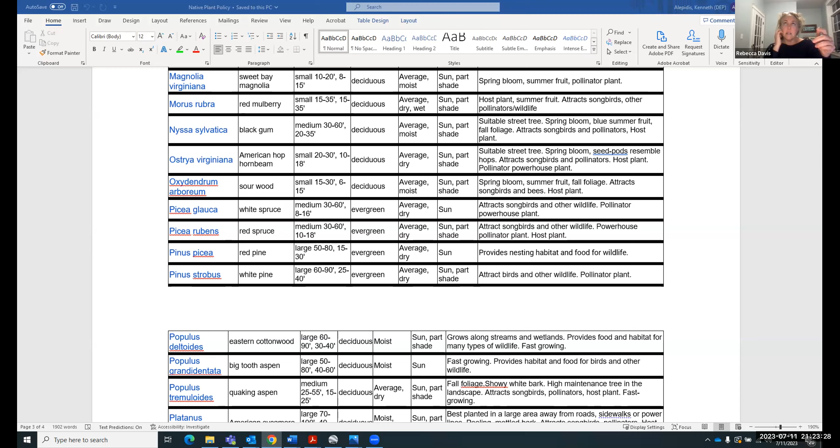Franklin was one of them, Franklin, Mass. Yes, I remember looking at that one. So just trying to figure out, I had put in this list. Like I said, I got it from somewhere else, from Ipswich. I don't think it's particular. I think it was updated, I don't remember when, but we can update it as we go.

So if you go back to the beginning, I just want to make sure, do you want this to mirror the tree policy? We can pull that up and compare them so that everything kind of looks consistent, or does it not matter? What do you mean mirror? Just the format. If you look at this, it talks about jurisdiction for the tree policy.

In the native plant policy, I just put that if it's subject to your approval - that's how I left it in red. I'm just confirming that's how you guys want to do that. But isn't the point to be able to say that when we put an order in, you're going to present us with a planting plan that's consistent with our native plant policy, right?

Isn't that how you do it? I mean, I think that's what we're going for, so we identify. Yeah. Okay, so I just want to make sure we're cool with that. And then, are we going to limit it to the plant? So anything with any plantings within the buffer zone that you have jurisdiction over and are reviewing and going to approve shall meet the policy. Are there going to be any exceptions?

And do you want to list them out here if you have any thoughts on that? Well, I'm not sure about exceptions, but do we want to asterisk salt tolerant species? Flag those specifically with an asterisk or something like that.

Could you also add in salt tolerant plants that would be required in certain areas? Okay, so that's upfront. Okay, that makes sense.

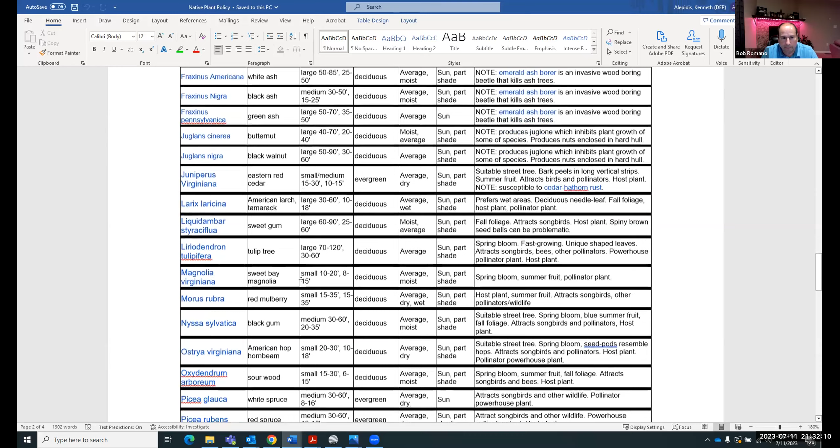So I'm curious, and send the tree policy as well - on that list, what fruit bearing trees are native? I just realized there's not a single native apple tree, most fruit trees are not native. Right, but what benefit is an apple tree in a wetland buffer zone? An apple tree in a wetland is not gonna survive either - not in a wetland, but in a buffer zone, your deer are gonna probably love those apples.

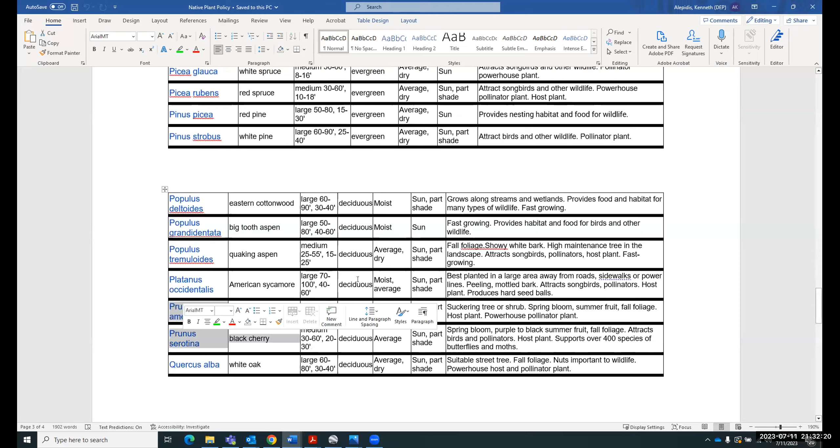I know what you're saying, Bob - you want a little bit of flexibility for something reasonable. I agree with that, but I don't think stating it up front is wise - I think that opens the door for too much wiggle room, it's a slippery slope. They're coming to you for a variance - if they want something different, they'll ask for that as part of the permitting process, instead of us opening it up by saying we'll talk about it if you want something different. Make them ask the question - they're the one asking something from the commission.

I just want to be careful because some fruit bearing trees are not only good pollinators but also a good source of food. Right, but you're not saying it's prohibited - they're coming to ask for a variance from other things anyway, so it's part of their due diligence to ask for a variance on every aspect they're looking for. And I don't think people are gonna be shy to ask if they want something different. That's true.

I would just make one tweak to the watering section - once a native species is rooted, it requires virtually no water, so it's not less water, it's virtually no water. Could you just stick that in as a comment or edit it? It doesn't have to be neat or grammatically correct, I can fix all that stuff.

Just if you guys all stick in what you think, that way I can put it all together. And even if it's a question, like can you insert something that would include this - I'll make up the verbiage if you want, or you can, just so I know.

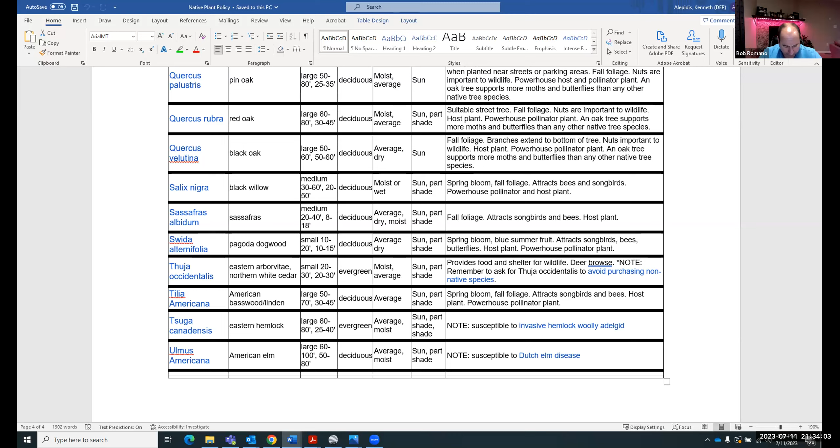Apparently crab apples are not native, they're from Central Asia. I'm trying to find any fruit-bearing tree that's native and not finding anything you'd normally consider. Fruit trees are more susceptible to diseases. High bush blueberry is native, but that's not really a tree, it's your favorite.

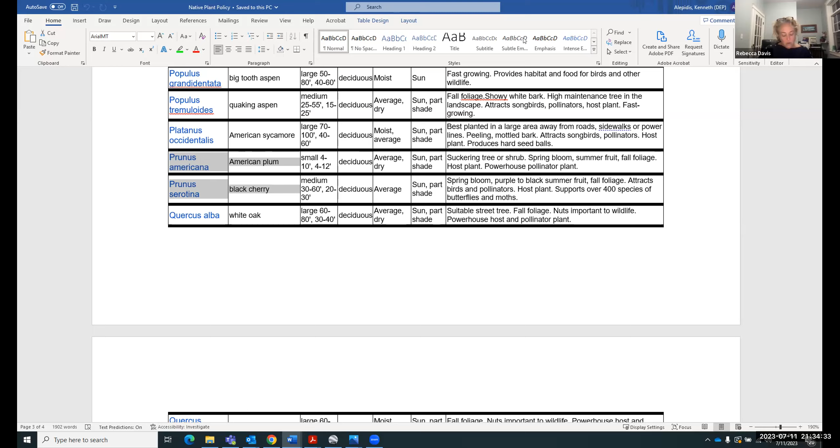I hope we can finish it next time. I'd like to have that up and running soon. So what's next? No disturb, which is falling in the same category. All right, we can back up for one second.

So, Clyde Court. We approved a list of plantings that were not native, but we also approved a plan that said it was doing native plantings. So the question is, do you want to leave it? What's out there now is not native, and it's in the rain garden, right, Rebecca?

Did you go out there and see it? I didn't see it, I asked someone to send me pictures. So maybe we don't care - it's the rain garden, it has non-native plants. We approved one thing that said native and another that said not native. So again, we could just leave it be. They haven't come back yet to ask for a certificate of compliance for that house.

I don't know, that's a tough one. You do have the condition that says any errors found could be considered changes. So it sounds like there's not much appetite for this, I'll just continue running past it and seeing non-native species. We could make a note in the certificate of compliance that if that gets replaced, it should be replaced according to the native plant policy.

This morning that rain garden was filled with water. I'd love to know if those plants are going to survive. Those daylilies will not survive, they're literally going to die - it was filled with water this morning. Yeah, I didn't notice it today.